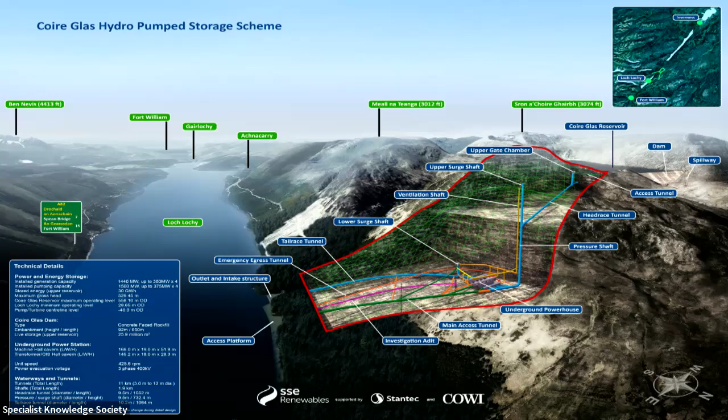The tunnels then connect to the existing body of water at Loch Lochy in the lower works. This diagram shows the complexity of what we're trying to build.

To the south of the fault, shown in light green, we have the Great Glen Fault Zone rocks, typically characterised by weaker, brecciated, heavily sheared fault rocks. To the north, we have the Tarvie Psammite Formation, which is more competent metasedimentary units, such as psammite and semi-pelite.

There's been a lot of work, and the Great Glen Fault has been studied extensively across Scotland. But prior to the GI works, there was quite limited information on the site, which resulted in a lot of uncertainty over the nature of the fault zone rocks in particular, and the position of the Great Glen boundary.

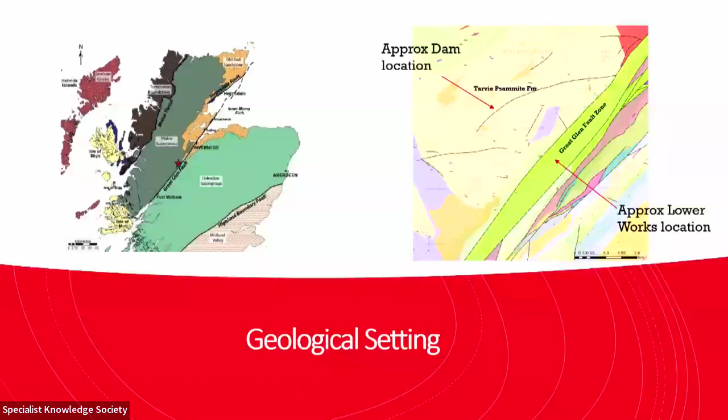This was one of the key project risks identified early on, and one of the key drivers for carrying out such thorough ground investigation.

In terms of ground investigation, we've carried out two main packages of work to date: the exploratory works, which we'll talk about today, and also the wider site ground investigation.

The exploratory works generally comprise a drill and blast tunnel excavated from the lower works towards the proposed location of the powerhouse cavern. It also includes an underground drilling, monitoring and testing phase to acquire ground investigation data for the scheme.

The key aim of this exploratory tunnel was to investigate the ground conditions and obtain detailed geotechnical information. It's worth noting it's quite a unique form of ground investigation, but it's allowed us to get a continuous log of data right the way through the fault zone and into the more competent units.

Just to touch on the wider site ground investigation as well - we won't cover this today - but this was carried out using more conventional methods: boreholes, trial pits, geophysics, and it's focused on the surface infrastructure, including the dam and reservoir footprint.

I'm going to give you a very quick overview of the design of the adit. You could probably do a whole hour's presentation on the actual design, so it's going to be very brief. The design was undertaken using finite element analysis together with the Q system for a range of in situ stresses using Rocscience RS2 and Plaxis 2D.

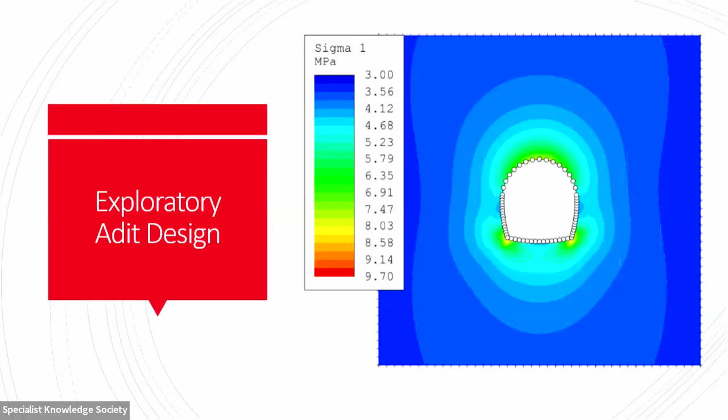I'm not going to go into the finite element analysis for this. I'm just going to touch on the Q system as it's relevant for the data collection. So we used the Q system methodology for this. It's a rock mass assessment developed in 1974.

It's widely used in tunneling and underground excavations to assess rock quality and support requirements. It's based off 6 parameters, which can be split into 3 parts. You've got your degree of rock jointing, which is your RQD, rock quality designation, and your joint set numbers.

And then you've got your joint friction, which is your interblock shear strength. This is determined by your roughness and your joint alteration. And then you've got your active stresses, determined by your water ingress, and your SRF, which is your stress reduction factor, determined by any weak zones or overburden pressures.

Our adit support system was based off these Q values determined using geological surface mapping. However, there was a healthy amount of engineering judgment involved, because the Great Glen fault zone lacks a lot of rock outcrops or good quality rock outcrops. It was mainly done through streams.

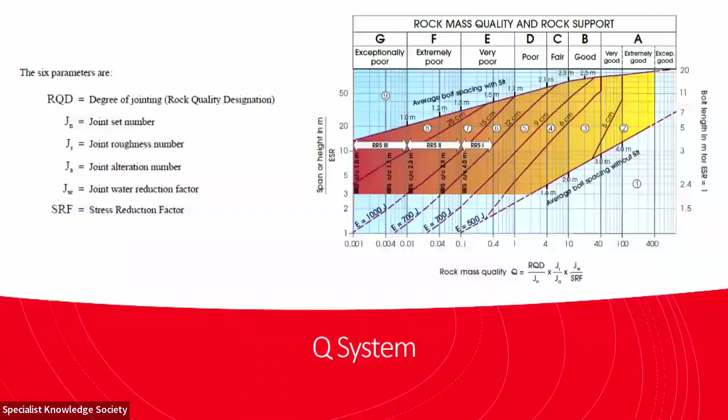This range of Q values for anticipated geology was used with the tunnel proposed spans and the structure type to determine the required rock bolt lengths, spacings and shotcrete thickness, thus providing us a full suite of support classes for varying Q values.

This is one of the standard adit profiles we had. It's a 5x5 meter horseshoe shaped profile with a 4 meter adit. This particular one was 80 mil of sprayed shotcrete lining, and the dowels are centered at 1.5 meters, and they were 2.8 meters in length, drilled in an array of 4 and 5.

Profiles did vary with passing bays and drilling niches, so shotcrete thicknesses and dowel spacings did change. Also, the first 10 meters was a set design, more robust with lattice girders used, and then the first 100 meters also has slightly thicker shotcrete. The range of support was from steel ribs to spot bolts, really.

I'm now going to pass over to Joe, who's going to talk about mobilisation.

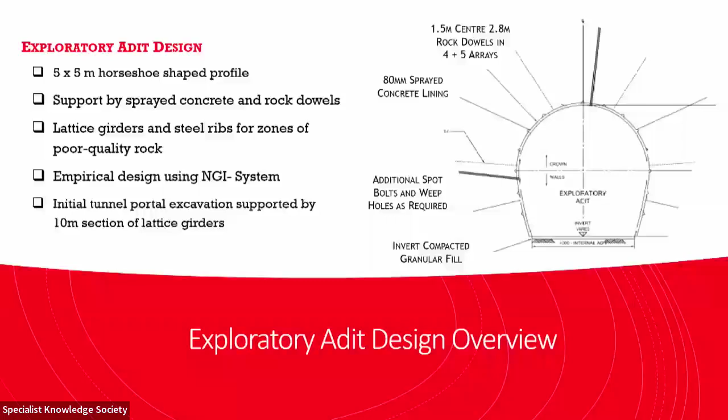To give a roundup of how the tunnel project was delivered, we started with mobilisation. We got access to site in the Highlands of Scotland in December, not the best time to be starting major earthworks, but that was preceded by a few months of a small ECI, and there was real keenness from SSE for us to get on site and working as soon as possible. So again, we're in the Great Glen of Scotland.

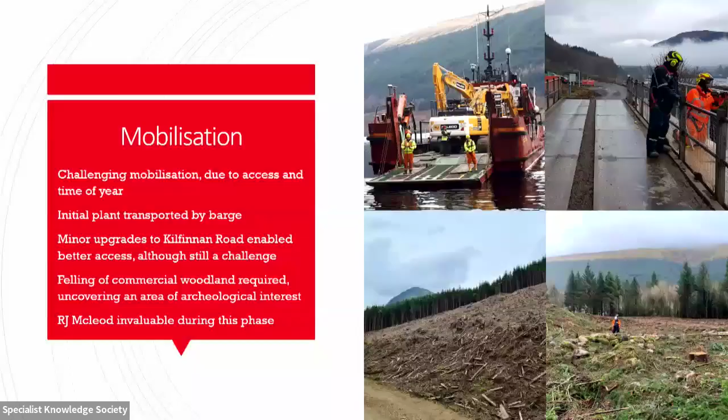This is the sort of thing we could be dealing with on any given day, or even sometimes in the same day. Whether you could see the other side of the loch was dependent on whether it was a good day or not. Mobilisation itself - due to the access available and the time of year, we had to be very careful with what we did.

First, a barge was used for the initial site plant deliveries, just to get us on there. The Kilfinnan Road, which comes to site, is a single track road with passing places through some tight bends and farmland. So a limited amount of work was done to strengthen some bridges and improve that as best as could be done, but that was always a pinch point for the project.

But realistically, we did manage to get pretty much everything in through that road and out again. The first works on site was felling of the commercial woodland around the area, giving us access to our compounds and the portal area, as well as some archaeological interest, an old sheepfold.

It should be noted, RJ McLeod were absolutely vital at this point. They're the local contractor, and they really allowed us to hit the ground running.

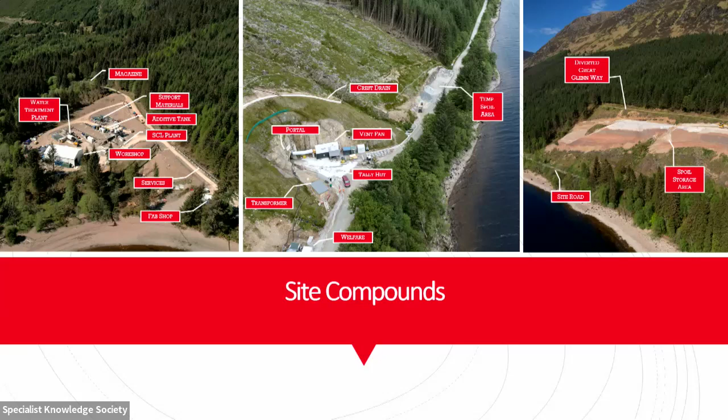So the 3 main site compounds I'll talk about here. The first one is Area 7, on the left. That was our main store workshops, where our SCL plant, provided by Cemex and supported by Normet, was located. We had the water treatment plant there from Zublin.

Say workshops, fabrication shops, materials storage. We had generators set up on site to provide 3.3 kV power, supplied to Area 7 and to the tunnel, so we were completely off-grid in the forest. We also had a magazine situated conveniently in the trees, out of harm's way, with good distances for any separation or for the capacity that we had.

Coming to the portal, you'll see we were right on the loch shore there, with a small line of trees in between us.

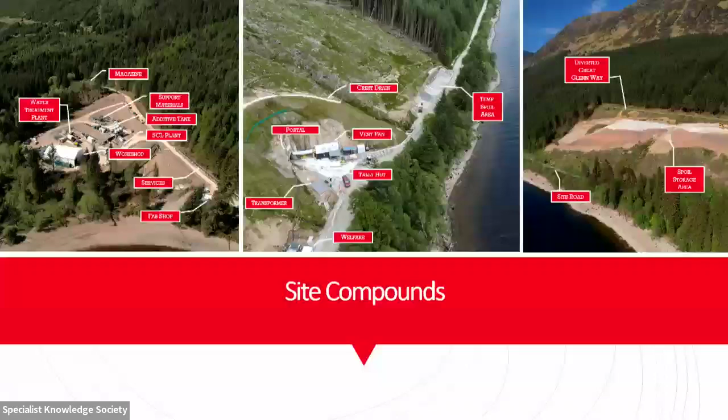That was the access to underground, right perpendicular straight into the mountain. We had a temporary spoil storage area there where we could work 24/7, whereas other areas we had restrictions - tally huts, transformer, welfare, ventilation, everything you'd expect to find at the portal.

To give a better idea of how the constraints of the site really were, on the right you can see the spoil storage area. You can see how close we are to the loch. Then we've got our main site access road.

The spoil storage area is on quite a steep hill. We've then got the diverted Great Glen Way footpath, which is a major tourist route and not always followed - it would not be irregular to find someone lost wandering through site, hopefully not when anything too much was happening, into commercial woodland and then straight up to the Munro above.

So we really were quite constrained in what area we had access to. I'll pass over to Tom now just to talk a bit more about the design of that spoil storage area, because that's interesting in itself.

Yeah, okay. Thank you, Joe. And yeah, thank you, audience. So Joe's mentioned already that one of the constraints on the Coire Glas works was access.

Initially they brought in material by barge, and then later brought in material by road. But it was never viable, via a single track road and a long unpaved section of road, to actually remove spoil from site - nor would that ever be an idea we'd really contemplate on this job.

So what we had to do was build up a major earthwork scheme, and we divided this into two halves. You can see the constraint we had from forest to lochside, and all the material from the tunnel drive went here. This was classified by grades, primarily fines content, and then was distributed into two large bays or cells within the spoil storage area.

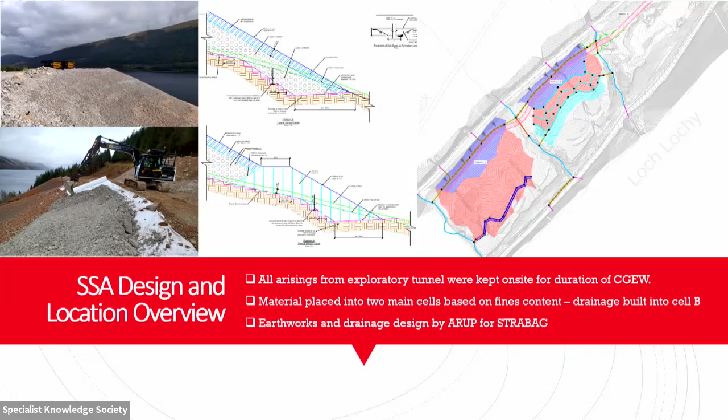Okay, so just carrying on - project team. With our location and the scale of the job, we had a small team, and self-sufficiency really was the most important part of working as remotely as we were.

In terms of permanent staff, we had about 20 to 25 site-based personnel who were predominantly on the technical side - engineers, geologists, health and safety, environmental. We were also well supported from North Yorkshire, from the other STRABAG office, about maybe 15 to 20, not necessarily permanently devoted to us, but from the support functions.

In terms of labour, we had 3 shift teams working on a 12-hour back-to-back rotation. We did a 10-5 rotation with them, owing to the site location and commuting distances - about one long stretch and then 5 days off in a row, just so people aren't spending their own time travelling.

On each shift team, 8 tunnel ops, mostly made up of your pit boss, drillers, shot firers, sprayers, and then 4 fitters and 2 electricians per shift.

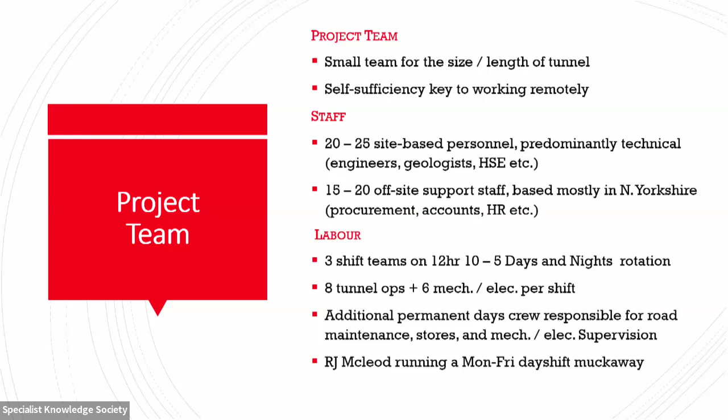Additional permanent day crew were responsible for road maintenance, running the stores, and overall supervision. And again, RJ McLeod basically ran the muck shift - we transported all spoil from the tunnel to the temporary spoil storage area, and they were responsible for taking it up to the main spoil storage area and the construction of the spoil storage area itself.

Okay, on to the good stuff. The first blast was done in March 2023. This was for the portal, so this was a surface blast. The results speak for themselves.

I was expecting a little bit more of a reaction, but anyway.

Those will have noticed the first part of that was a pre-split. That was really effective at giving us a really clean joint to break back to. You can actually see from the bottom image there, the half barrels are still showing.

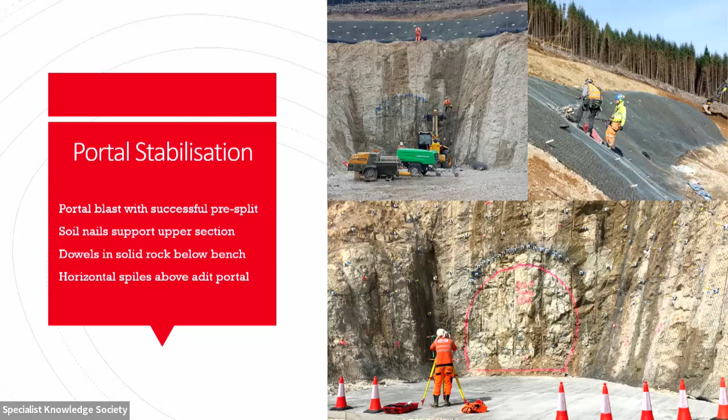That was really effective, with Tom Woods in the audience doing a bit of surveying for us. Above the portal, we had soil nails in some of the weaker ground, and below a bench, we were into rock dowels. Then there was a set of horizontal spiles built in above the portal for protecting those first two advances.

We then added to that a false portal. As already mentioned, the first 10 meters was done with lattice girder support. So we built effectively ring zero inside of the portal, giving us the ability to connect onto that lattice. So we're already working off something that was set out into the correct position.

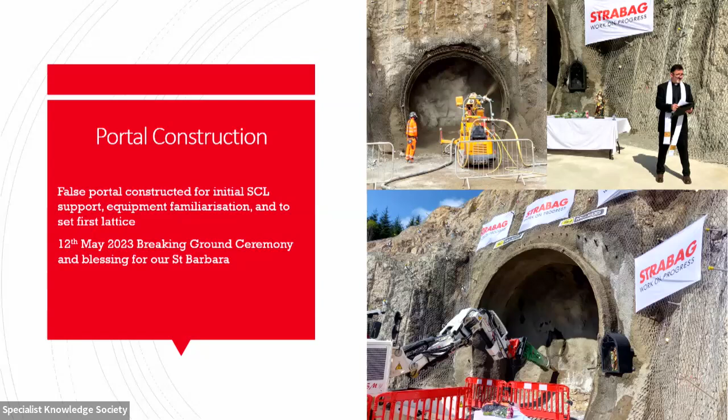That was then sprayed in, and we had the inaugural breaking ground ceremony with Father Danny from the local church, who was very keen to get the local community involved with what we're up to. So that's breaking ground with the excavator, which basically took us into the tunnel construction period of the project.

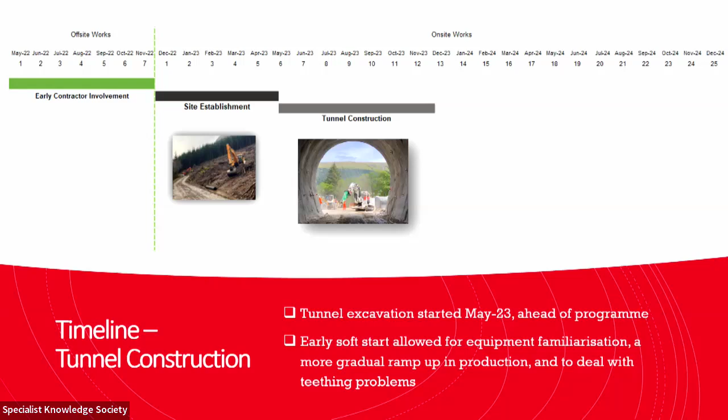We started just ahead of program in May 2023, and we had a bit of a soft start, which was really useful to make sure all the equipment was working. We had a gradual ramp up in production, so it wasn't a mad dash to start, and any teething problems came out through that.

We've seen the cross section, but this is the long section that we were dealing with. It was 900 meters long. We had passing bays roughly every 250 meters. Generally it was quite straight, then we went onto a slight long radius right-hand bend. Those passing bays give us logistics of the turning circles, and we had the drilling gallery at the far end.

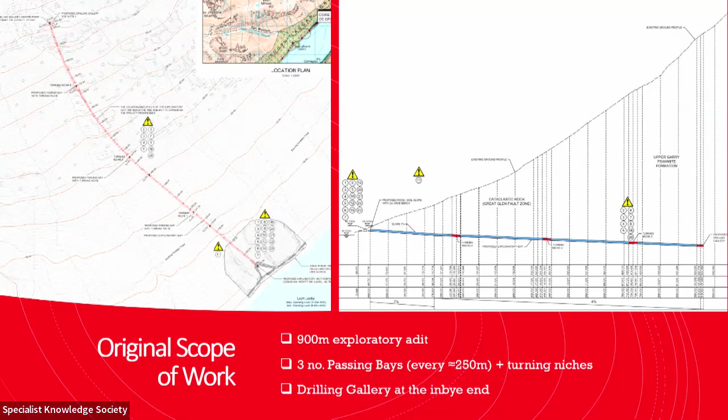Vertical alignment: the first 100 or so meters was done quite steeply at 7% grade, and then after that it was a 4% grade right down to the drilling gallery.

So for those not familiar with drill and blast, we'll do a very quick run through. Basically each advance cycle, and we'd normally do two of these per day in a standard section of Class B tunnel, starts off with drilling. We'd then charge that, using cartridge emulsion, which is the easiest thing in terms of procurement and use given the length of the drive. We'd then blast.

We needed between half an hour and an hour to allow the fumes to clear, depending on the length, and we'd go in and muck out that drive and that advance. Scaling in this ground and hard rock was some of the most important part of the process, and that was especially important with the blocky ground that we were in.

We then had an hour dedicated to the mapping. Tom will mention more of this later, but this was one of the key parts of the project. That would probably make most pit bosses livid, the fact they know they've got a geologist unmovable for an hour to look at the face. But on this project, it was a very specific thing.

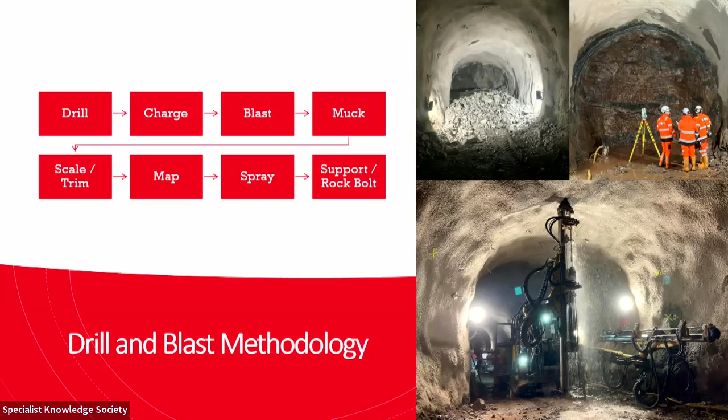Spray was then completed, so sprayed concrete to the desired thickness, and then we'd install supports depending on what that mapping had told us, and we'd repeat the cycle again. A bit more about that support class system as well.

So we've seen the design, now how that would actually work on site. We'd have the daily review meeting, we would get the design for the upcoming section of tunnel, and we'd sign off as required on a required excavation support sheet. That is something that everybody who needs it—engineers, geologists, pit boss—can have in their pockets, telling them, based on the information the geologists provide, what support they need to install.

The mapping's then completed, that comes out with that Q value, and the support can be decided. But there's also elements of flexibility built into this system. There are toolbox measures put into that if we encounter water, if we encounter blocks that look like a wedge feature that can't be scaled, all sorts of things.

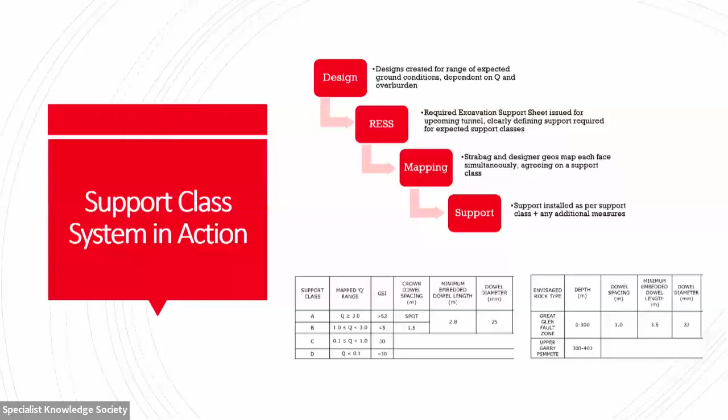And this is an iterative process as well, which is good. So features we encountered throughout the tunneling, as we went on, if we found solutions that were better at dealing with them, we could put an RFI in, build that into the system, and then we've got the best toolbox to deal with the issues or just the ground itself.

Very quickly, equipment.

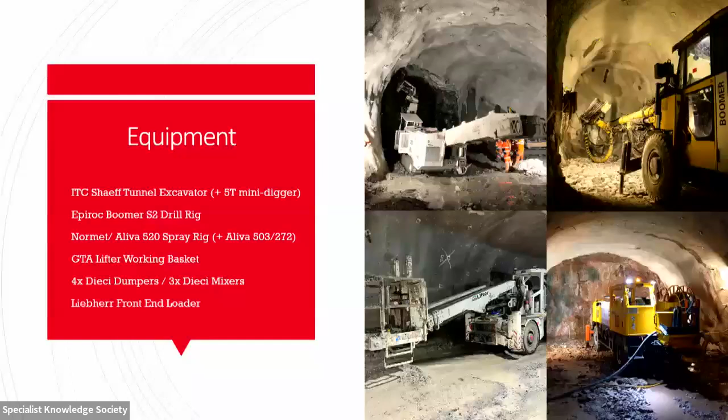So we're using an ITC Shaeff with a 5-ton mini digger as a backup, Epiroc Boomer S2 drill rig. We had a Normet Aliva fully electric, I believe the first fully electric 520 in the UK, plus a backup 503 and pump. GTA was a heavy-duty lifting basket. Dieci dumpers will be familiar to most, and then a front-end loader for the surface and for cleaning up the muck pile after the blast.

Some of the good software I had available - the Epiroc Underground Manager software was really useful. Rather than setting out a profile on the face from a total station, what we were able to do is set up a laser line to the side with the total station. The arm on the boomer could then be sighted on 2 targets onto that laser line, and the rig would know its position in the tunnel in space. You tell it which drill plan you want for that section of tunnel, and it'll know where the hole positions are.

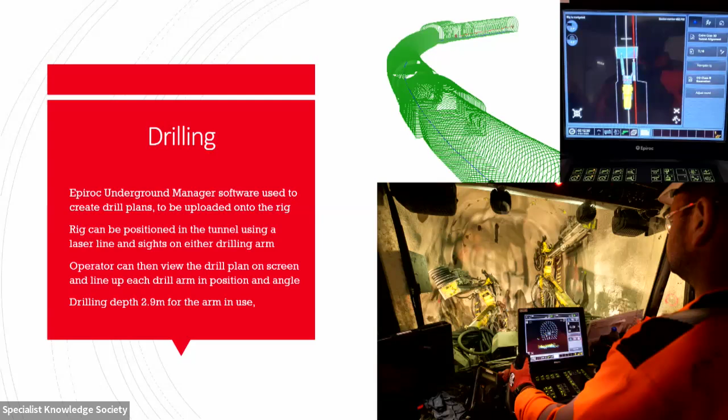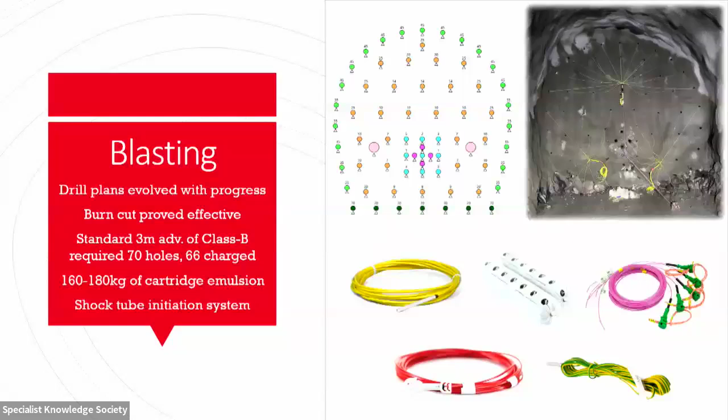Really useful. Blasting, we were using conventional emulsion explosives, cartridge emulsion. We were generally drilling a 3-meter advance, which requires about 70 holes, 66 charged, 4 void. We were using about 160 to 180 kg of cartridge per blast, and then it was a shock tube initiation system, so 6-meter lengths to most of that in the hole, followed by bunch connector, surface connector, and electric det to set that off. And if it all went well, it would look like this.

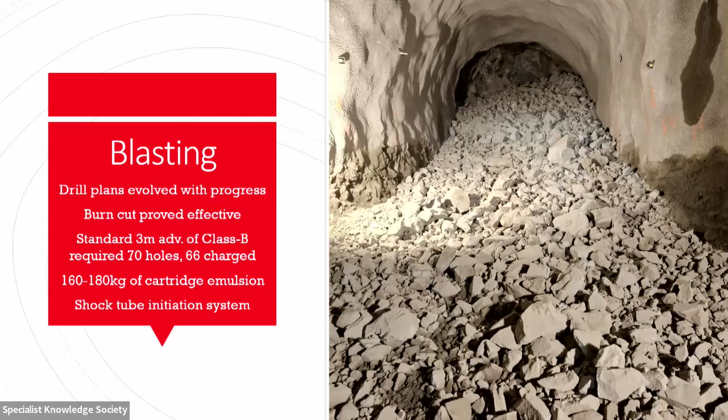Fragmentation was one of the most important things for us. Timing was everything. We didn't want to spend time breaking apart loose blocks and large blocks. Everything had to get the apron of the Shaeff. So those that know their powder factors might have thought we were probably overblasting a little bit, but time was important to us, and getting it up that Shaeff as fast as possible was quite important.

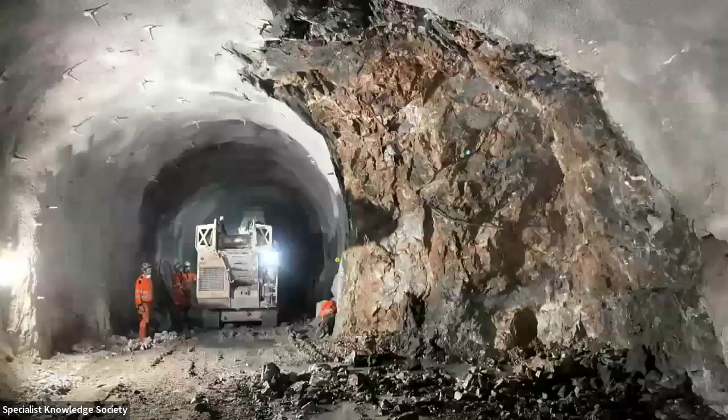Towards the end in the drilling gallery, the blast got a lot bigger. By the end, we were sort of setting off about 360 kg of cartridge per blast. By the time we got to the real drilling gallery sections, 5 bunch connectors - you know, some good blasting.

Profile control - again, we had some good software available. Amberg was really useful to us. We could basically build the tunnel in the software. Engineers for the chainage of the tunnel knew what the profile was. We could do as-built down there at the face to make sure that everything was in tolerance in terms of profile, check it again after the spray, and make sure we've applied the correct thickness. And then all of those records form basically our quality records for the job.

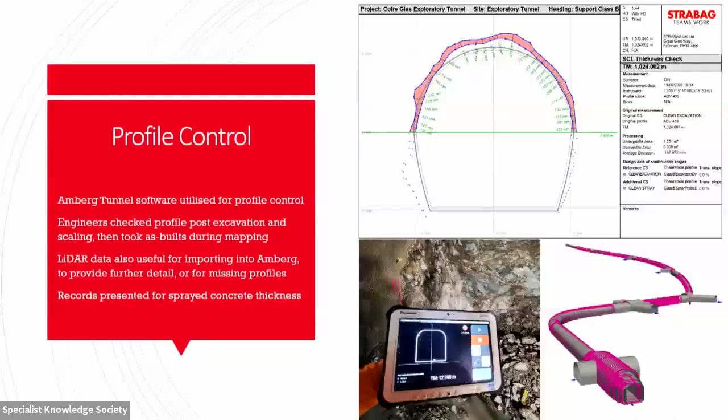That's all very well. That was basically building the tunnel, but actually, as Tom will say, that wasn't the most important part of the process.

Yeah, so for the most important part and the real reason for the adit, the geological deliverables and processes - mapping was undertaken at each advance, and it was a process between both the contractor and the design engineers.

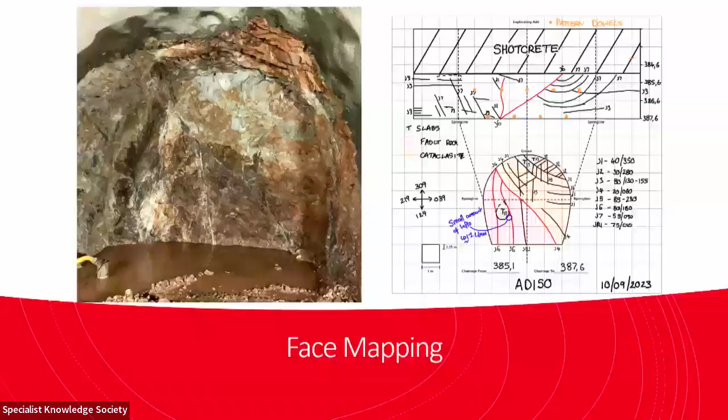If any further spot bolting or anything like that was needed, then it would also be signed off in the DRM. And that's just another example of one of our mapping sheets - that's for a drilling gallery. You can see you've got a nice felsic intrusion cut across with a discrete fault there.

This section was fairly early on in the tunnel, in the cataclasite, which was fairly difficult to map, hence why you've got heavily jointed and varying jointed sets.

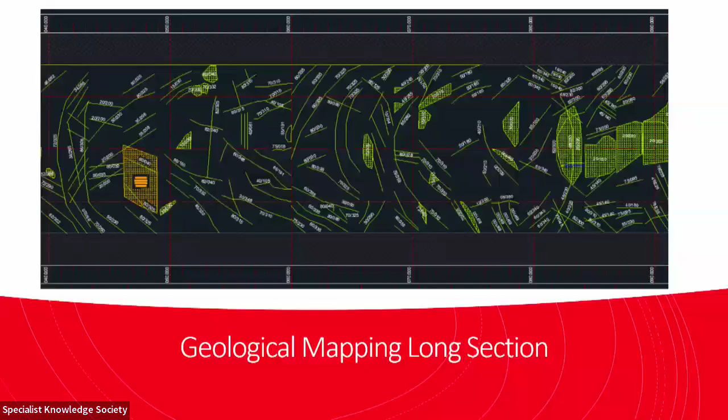Then we had the advanced probing. Probing was undertaken approximately 20 to 25 meters in advance of the tunnel. Two probe holes were undertaken to provide an idea of what we were to expect when it comes to blasting.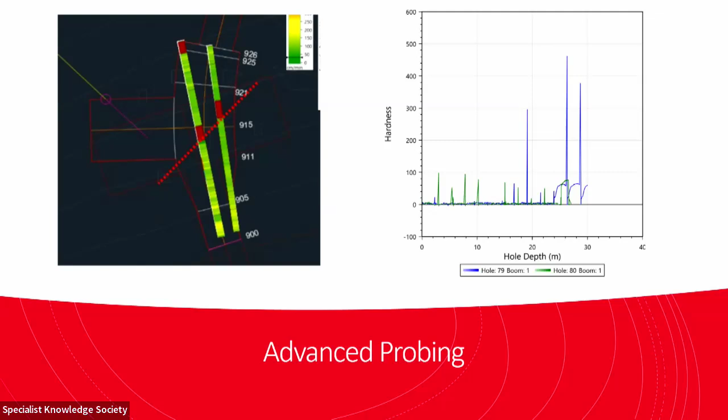Green is good ground, where drilling was slow, and red is poor ground where drilling was slightly faster. Data was collected from the boomer on 20mm increments, measuring the drill length and time to provide us with a penetration rate. The graph on the right shows the difference between the two arms on the boomer. The peaks are actually where they've changed the rods, so it's a fairly consistent drilling penetration.

Similar to the probing, we also used measure whilst drilling data to give us an idea of where we encountered some soft material. You can see on the right hand side where we hit the fault, which will be spoken about a bit later.

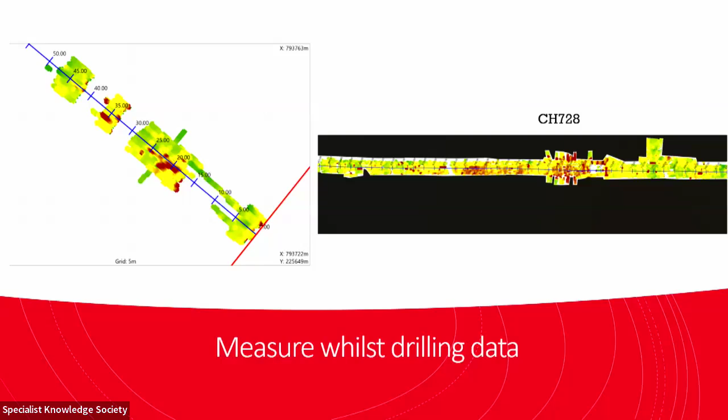And then while we were mapping, we were doing the LiDAR and the photogrammetry. We used this data to correlate with our mapped joint sets that we picked in person.

We used the LiDAR data in a piece of software called Maptek. That allowed us to both manually and automatically pick the joint sets. This allowed us to collect much more data, more measurements of dip and dip directions of the discontinuities, also more accurate measurements.

However, the only downside to this was that it was heavily dependent on the quality of the scan. If the scan wasn't particularly good, then you couldn't pick anything out.

Then the uses of this LiDAR data - we used the Rocscience suite. We took this data and input it into Rocscience Dips, and we pulled out our dominant joint sets.

Following that, we would use Rocscience Unwedge to determine if there were any wedges in our advances, and if our prescribed support was suitable. If not, then we had to install further rock bolts.

In the section on the right hand side, we found a wedge that wasn't quite meeting the right factor of safety for us, so we had to install an additional three 7-meter rock bolts into the crown due to the persistence of that single discontinuity. Now I'm going to pass over to Joe to talk about the SQ and the fault zone.

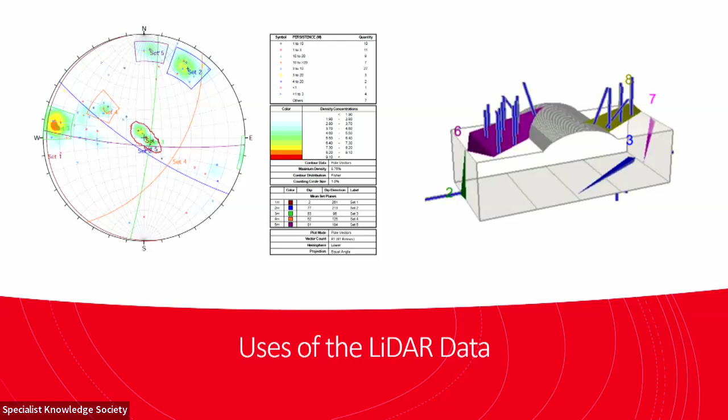Advance 282, you can see here the start of a feature in the crown, competent rock underneath, and then this is fault gouge. My geology knowledge is not as good as the others, but on the next blast we could see very clearly that what we were into was very poor quality rock.

We had about 1.5 meters of overbreak above this.

When the face mapping was done for this advance, we'd already decided to get in and spray it, or at least the poor material, just to get it closed as soon as possible. But we were no longer in good, competent hard rock. We were at an overburden of about 420 meters at this point, and we'd also started widening into the next passing bay. The Q was right down low, much lower than some of the other advances.

We'd hit discrete faults before, and there was a hope this would be the same. So there was agreement to do a short advance, a little more than a meter, and hopefully see some improvement in the crown. But after that blast, we could see this material went straight up to the top, leaving us with poor ground and out with the design parameters.

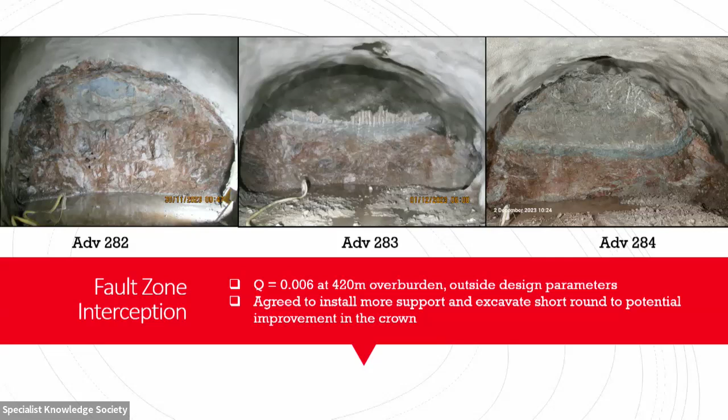The face mapping shows it just as clearly. I like the note here that says fault material not affecting stability in this advance, but we can see it only got worse. Credit to Antonio for these ones.

We managed to do some investigations on the ground. We had probing basically of access to us, and we probed behind us and in front of us. We were able to sort of map out the location of the fault. This sketch is lovely - I think this is one of Rob's. Forward of us, whenever we hit the change in color, we were aware we'd hit this faulted material.

We went ahead of us, perpendicular to the inclination of the fault we'd worked out, and we were still not seeing any improvement. So that left us out with the design parameters. The Class D design only worked for an overburden up to say 400 meters, and the decision was taken to abandon the passing bay and relocate it. I'll let Sean run through what we then did as a project to get past it.

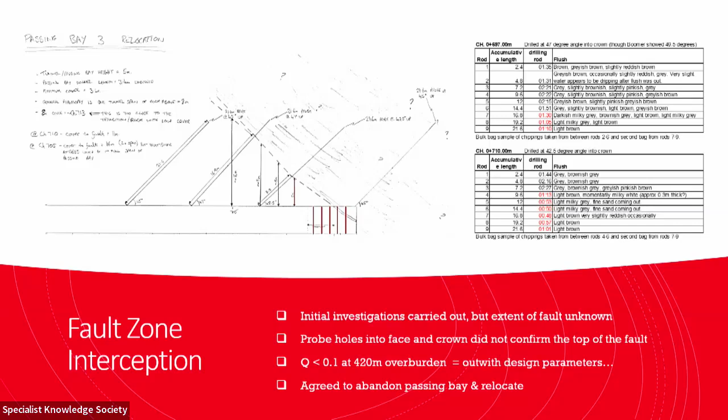As Joe says, the ground conditions encountered here were out with the design parameters for the original design. So we instructed a halt to tunneling at this point, and instructed Stantec-COWI to develop a bespoke design to allow us to continue the tunnel safely. It's worth noting that Stantec-COWI carried out this design with very little information, mainly based on the face mapping records encountered in the main part of the fault zone, as well as the additional probing that Joe's just shown.

In terms of the design as a whole, it was more based on numerical modelling, as well as the application of the geological strength index as opposed to the Q system, which had been used for most of the other tunnel. This was a really good period of collaborative working between SSE, Stantec-COWI, and STRABAG to optimize and refine this design through several technical workshops.

You see in the middle of the screen here, this is a cross-sectional profile of the new support that was installed. The key features are this circular profile changing from the original horseshoe shape. This is formed from a steel ring, as well as 300 mils of shotcrete sprayed around that. We have a series of radial dowels surrounding the circumference of the tunnel, as well as spiles in the crown and face support in terms of face dowels to give extra support during excavation.

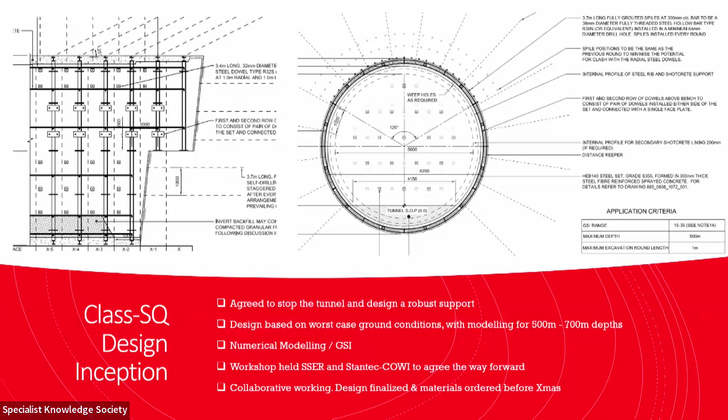In addition to this, the support leading up to that fault zone had already been installed through shotcrete and dowels. Stantec-COWI also demonstrated that the fault plane was likely to dip just above the crown in this area. So the face mapping was showing generally okay rock, but there was also a risk of poor ground just above the crown and insufficient good quality rock cover.

So with this part of the tunnel over a length of maybe 7 meters, we asked Stantec-COWI again to produce a bespoke design in this area in the form of reinforced steel ribs and added shotcrete. It's got a funny profile here on the image on the right, and that's where we've expanded out and widened for the passing bay that was originally proposed at that location.

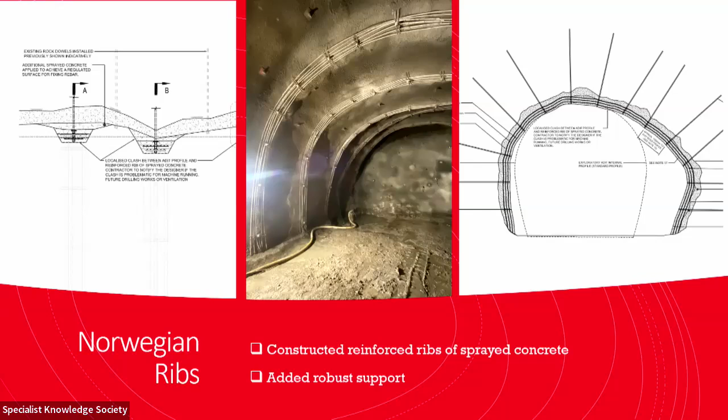So from our point of view at SSE, encountering the fault zone did result in a delay to the works, but it's something we're really happy we identified during this exploratory tunnel. We've pinpointed the location of it and characterized the nature of it as well, so we see it as a positive, taking that into the main works.

One of the things we were able to do during this stoppage, while we were redesigning the tunnel to advance through, is some quite good ground investigation. The purpose behind this was to understand the fault zone and verify the design assumptions, which at this point were actually progressing at some pace.

We did this in two main ways. The first thing we did almost immediately after stopping and forming those Norwegian rib advances was to carry out a tunnel seismic survey. We brought in a company called Amberg to do that, and that survey estimated the extent of the fractured ground by a non-intrusive method, so we could determine what additional ground investigation works we could sensibly do within this stoppage.

The other main thing we did during the stoppage was drill a horizontal borehole, in the direction of the tunnel drive. The idea behind that was to estimate the thickness of poor ground. You wouldn't necessarily be able to estimate the true thickness of a fault, but that's more of an academic exercise compared to the zone of poor ground, which you'd see very clearly through the geotechnical log.

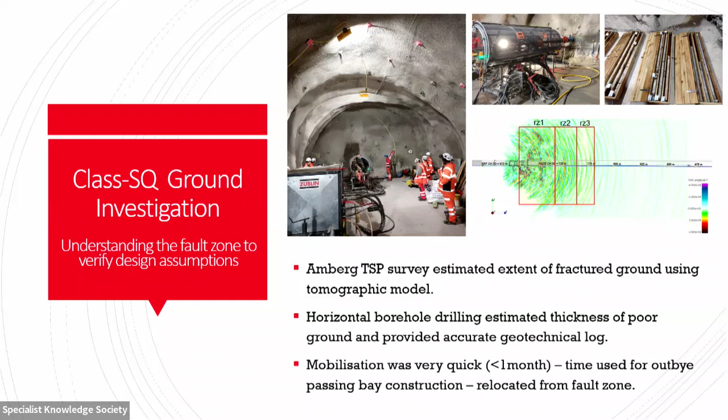I'll let talk more about the design of the SQ. So when it actually came to getting through SQ, we've seen the cross section in 3D - that's the sort of level of support we were dealing with for installation.

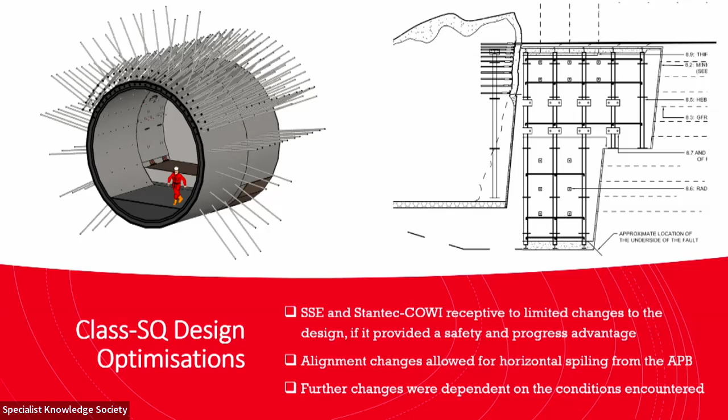As Sean's already mentioned, thankfully at this time we also had the ability to make some optimizations that weren't going to impact the safety, or in fact improve it. Because we had the abandoned passing bay in that zone, we actually had quite a large space to deal with, and that allowed us to do horizontal spiling rather than the overhead spiling per advance. We were able to couple the drill rigs, so we ended up doing about 12 meters of horizontal spiling ahead. That meant we generally stayed outside of the profile with overhead protection that was much easier and much faster - getting through the fault zone quickly was in everybody's best interest, as limiting the time for open ground was really important.

What that actually looked like in the end, you can see on the left the number of profiles we had. The first was the normal tunnel alignment, we then brought it to the side 1 meter, and eventually down. You can see the blue and white markings for the spiling positions.

To restart tunneling after a few months of no activity over winter on site without tunneling happening, we wanted to make sure we were fully ready to restart. We did two pocket excavations either side of the face, which allowed us to site the first leg of an H-beam, giving us something to work on to connect that first advance.

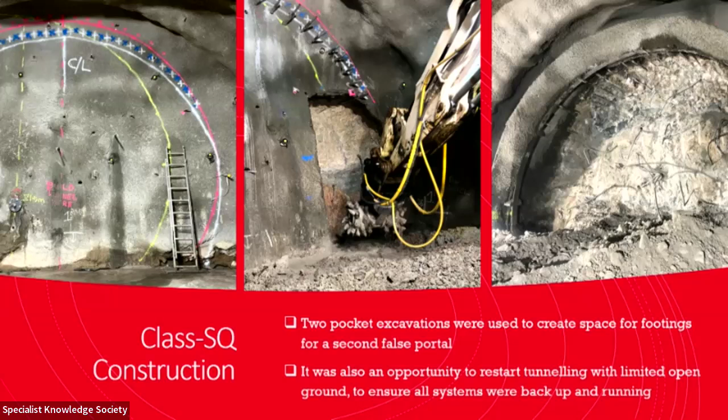You can see the overhead spiling was quite effective. It limited overbreak - it couldn't get much higher than the spiling - and gave overhead protection for the guys working in that area positioning the ribs, with realistically a small amount of shotcrete. The overhead spiling made it a lot safer.

Other things quickly to run through: the shape we were using at that point, given it had the apron on the front and we were now going to top heading and bench excavations, we ended up bringing in the Terex 210 for this area. You can see from the space proofing that it was really well suited for the sizes and the area we were working in.

You get an idea of the amount of support in each area from that central photo - you've got the H-beam ring going full circle, dowels in between, and the overhead spiling. This was really heavy, soft ground tunneling works basically in hard rock.

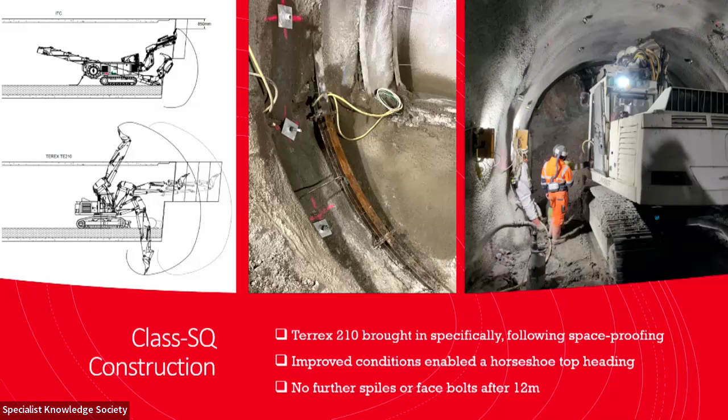As we went along, the ground improved. We were able to drop the bench level quite quickly from a half-height bench to a horseshoe, which eased the access and the space we had available, as well as the working at height from a high bench versus a lower one.

As things improved further, we actually resumed blasting, not with any great amount of powder, but with spacings quite wide, about 1 meter. We were able to fracture the face quickly and then just finish it off with a road header.

So in the end, we installed 28 meters of Class SQ, completed in 1 month. We averaged just over 1 meter a day through that zone, which I think was very impressive given some of the initial advance rates we thought we'd be dealing with. That took us through the fault zone to the end of March 24.

At that point, we basically had what we thought was the home straight to the drilling gallery. I'll let Sean take it from there.

Spring 2024, tunneling was going pretty well. To provide more context to the overall project, data was being reviewed and assessed from the exploratory works in real time and used to verify assumptions for the main works reference design. We were really happy with the quality of the data we were getting from the tunneling, and instructed an extension to the tunnel.

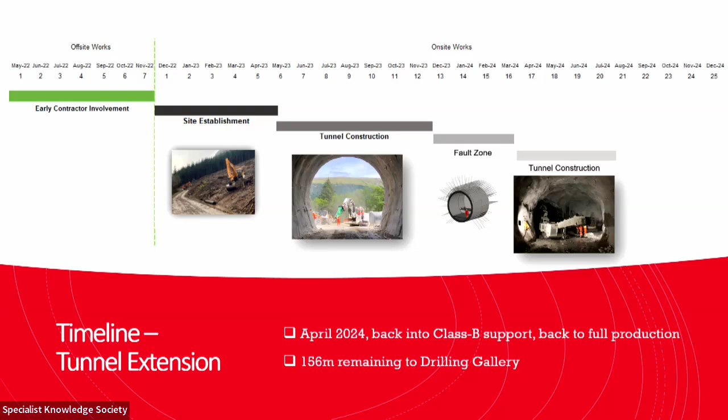This resulted in an extension to the tunnel of 300 meters, and also the construction of 2 additional drilling galleries. You'll see from this diagram we're tunneling at greater depths than originally planned, and there's also a slight change in alignment. The tunnel kinks round to the right in the northern part, curving around the side of where the proposed locations of the caverns were to be sited.

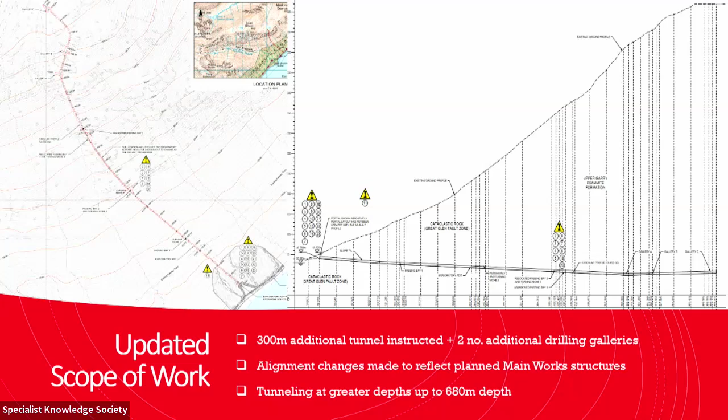In addition, there was a change to the underground ground investigation works. The original scope had 1 drilling gallery and a series of boreholes drilled from that single point. With the new alignment, we had 3 drilling galleries, drilling from multiple points along the extension. This increased spatial coverage of the data, as well as enabling in situ testing in closer proximity to where the caverns are, and at more representative depths. While these 2 changes were quite significant, we're happy that we maximized the data quality, particularly from the tunneling here.

Just to talk about the delivery of that - although it came as a bit of a surprise, we got a very clear instruction from SSE that they wanted this extension. We didn't know exactly what it looked like at that point, but they gave us a clear instruction: keep the people on site, get the materials and equipment you need, and get it done. We were aware a lot of it was going to have to get worked out along the way.

For a long time, the whiteboard on site was the most up-to-date design information we probably had. We were literally sometimes getting the information on a Friday afternoon for what we'd be building next week. It didn't help that April was our biggest month of production just before the extension. So we got to it very quickly.

You can see from the center here, these are the three galleries, gallery A, B, and C. Every different color is a different profile. These sections were complicated in the profiles - we needed higher profiles in some places to enable construction off to the side, and we had the testing niches to think about, which were a different profile again.

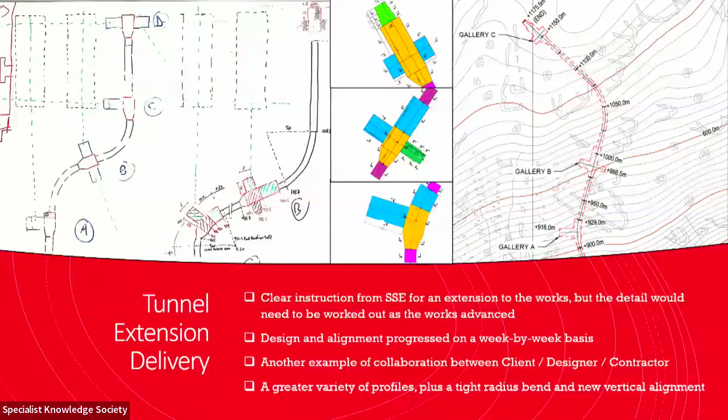We also had changes in a tight radius bend, which became basically the limit of what we could build and how tightly we could go, and changes in vertical alignment. You can see from some of the photos, we were really into some of the largest spans of the time - 8 meters wide by 6 meters high.

The biggest hurdles for us with a tight time frame was the procurement of the explosives. They're not an off-the-shelf product. Our suppliers, Brexco with Austin Powder and Orica, did fantastic work for us to get some of these detonators at the front of the queue and into the country from Europe.

Otherwise, we never would have been able to proceed. Other things like the refuge chamber, we'd never needed for the works before, but because we were now going to be doing the GI works with 2 open faces, or 2 drilling faces, we needed a refuge chamber.

So people could work in proximity of each other, and that had never been envisaged. Things had to be bought quickly and get to site as soon as possible. Labour was all signed, sealed to go off to HS2, and we needed to pull them back and say we need you for an extra 2 or 3 months. But anyway, the last blast, 502, was done on the 1st of August '24, only 3 months after the extension had been instructed. We built 3 galleries, 200 meters of tunnel, in that short period. By that point things were really up and running.

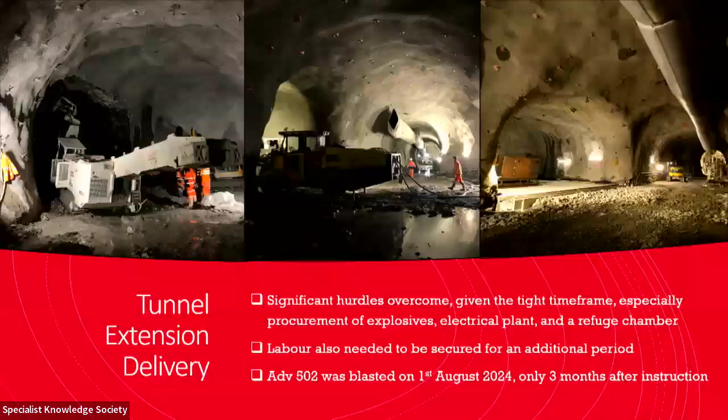As Joe said earlier, there's a total of 502 advances mapped for the tunnel construction, about 5,000 rock dowels installed, and 4,500 meters cubed of shotcrete was installed over the whole thing.

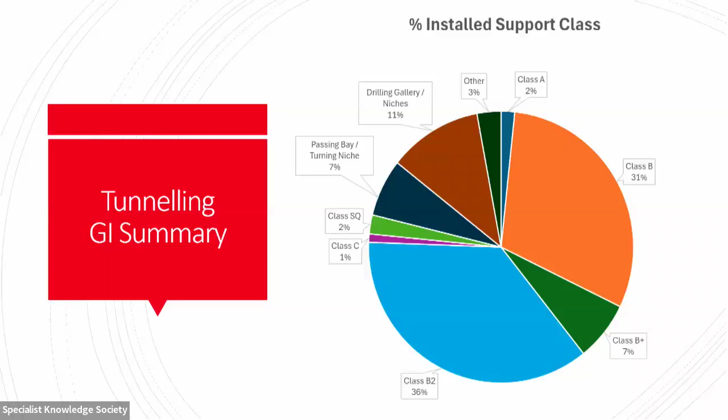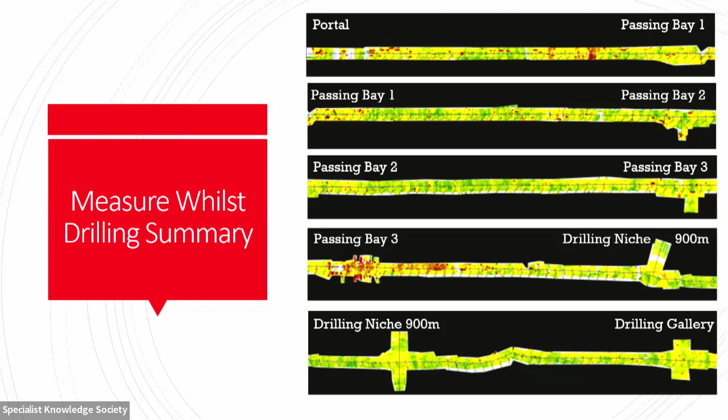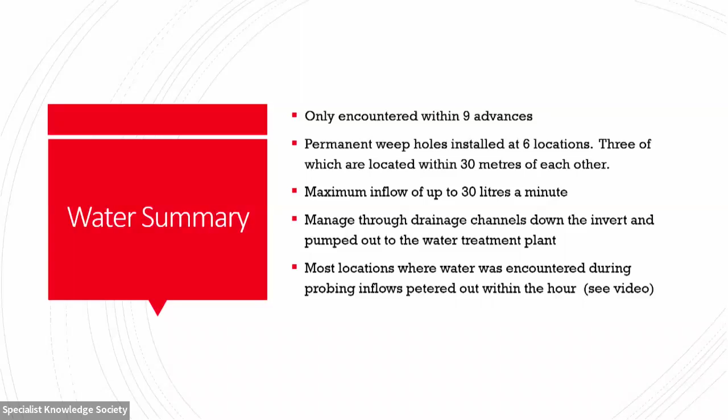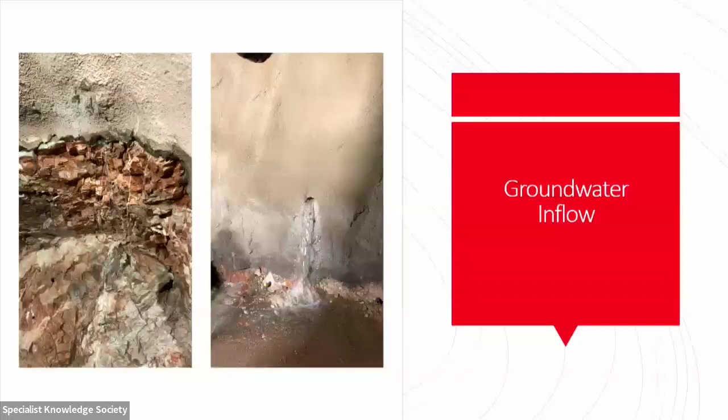But yeah, it's all good. Most of the probe holes were dry. There were a couple of probe holes where water was encountered, but it always petered out within the hour, so it didn't really stop progress. Just a couple of videos of water. You can see on the right hand side, that's the probe hole - that didn't last very long, about an hour. You can see shower-like from the joint set on the left-hand side.

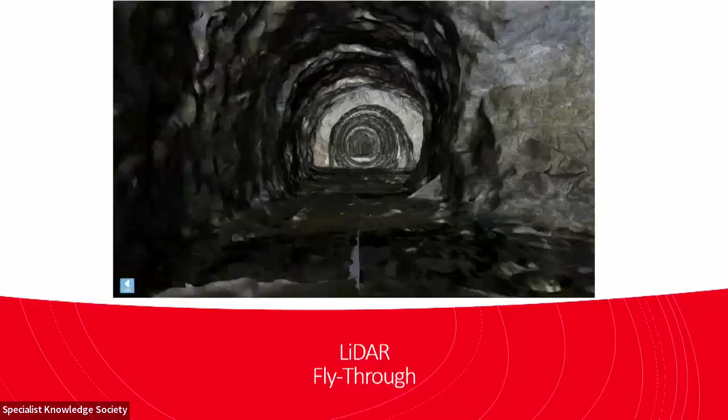And then we've got the LiDAR fly-through. Each mapped advance had a LiDAR scan, all measured at 1 millimeter scale, and you can see the excavation profiles. You just pass through the first passing bay, and then as we get past the SQ system, there's a notable difference in the quality of rock - you can see it's slightly more blocky. I'll let that run out as we come into passing bay 3, then quickly into the SQ section, and it starts to get much more blocky as you pass into the first drilling bay or gallery, and then into the second before you get to the end of the tunnel.

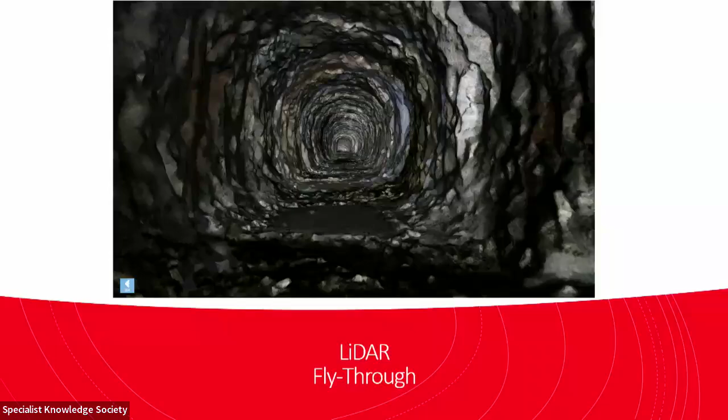Pass over to Tom for the underground GI. Yeah, okay, so one of the things which that LiDAR survey really shows is it gives a very, very good meter by meter record, an incredible density of data. Tom certainly stole my thunder earlier on when he said that the tunnel itself is an incredible form of GI.

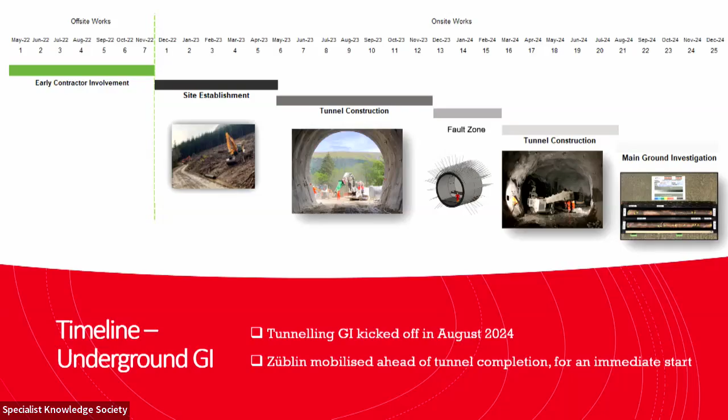While that may be true, what it doesn't do is give us the same predictive power as a series of boreholes do. So, as Sean said, this design was quite dynamic as we were progressing to each of these drilling galleries. But it allowed us to consider the construction and operational requirements for that underground ground investigation work - the logistics of bringing in drilling equipment, and it opened up the opportunity for simultaneous drilling operations in different galleries, and simultaneous in situ testing and drilling operations as well.

Overall, we were able to carry out an underground ground investigation campaign which has been one of the largest and most complex in the UK in recent years. This was completed between August and December 2024. A total of just over 1,300 meters of wireline core drilling was carried out across 8 long exploratory holes, the longest being 285 meters horizontally, and a total of 415 meters of conventional core drilling across 23 shorter holes - and by short hole, I'm talking up to 84 meters long.

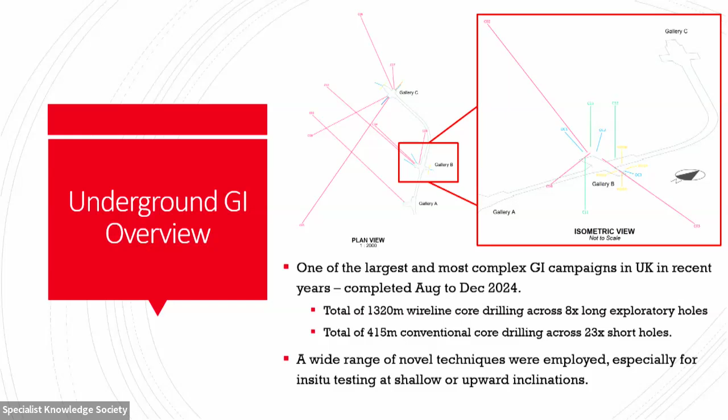A wide range of novel techniques were employed, especially with respect to the geophysics and in situ testing. Many of these holes were at very shallow inclination, or indeed upwards inclination. That's not conventional for ground investigation at all.

One of the primary components of the underground ground investigation was the drilling and logging. Core drilling was carried out by our specialist subcontractor Zueblin, a group company who also carried out the drilling for the SQ works. We generally used wireline double tube drilling at CH96 or HQ size - for those who understand ground investigation, that's quite a small core size compared to what's normal, which is Geobor S for a vertical hole.

And we used specialist electric hydraulic rigs, which were capable of drilling at any inclination. That was an important part of this GI because so much of it was at a very shallow angle.

Core logging was done by the STRABAG UK team, within the drilling galleries - that was deliberate, to avoid any damage and minimize the amount of transport and damage to the core before we logged it. Ultimately, we spent an awful lot of money getting the tunnel to this point, and an awful lot of money drilling cored holes. We want to be able to log this, and log the in situ conditions without damage to the core.

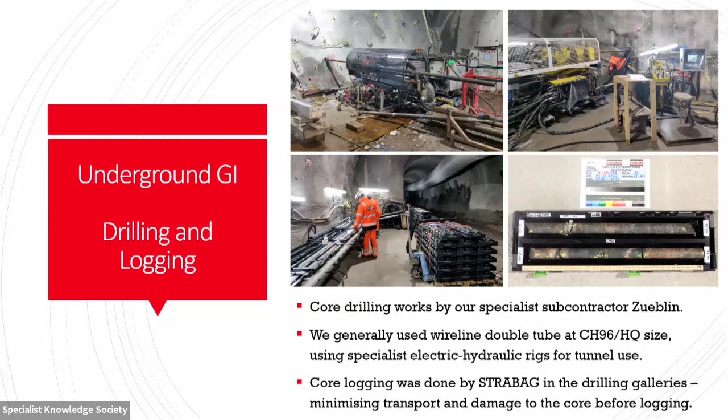I'll say a bit more on the in situ testing - we carried out a large number of quite varied techniques. The in situ testing was carried out for three main reasons. First was to determine the ground composition, the structure of a borehole. Our primary tool for this was wireline geophysics and televiewer data.

Again, because of the inclination of some of these holes, we had to come up with novel tool pushing techniques. Normally this is lowered down on a wireline winch on an A-frame; we were pushing in the tools with the drilling rig and then pulling them out with the wireline winch. That's not normally done. We also carried out tests for in situ strength.

We did three main tests for this. One is a Goodman jack - that's an older method designed really for hard rock, which we had. We used a high pressure dilatometer, generally designed for softer rock, but we actually carried it out to probably its operational limit. And we did a plate jack test - a fairly simple concept where you push apart the tunnel sidewalls with a very large hydraulic ram and measure the deformation of the sidewalls very accurately. That required an enormous amount of temporary works, the smooth blasting which Joe mentioned earlier, and preparation of bearing surfaces as well.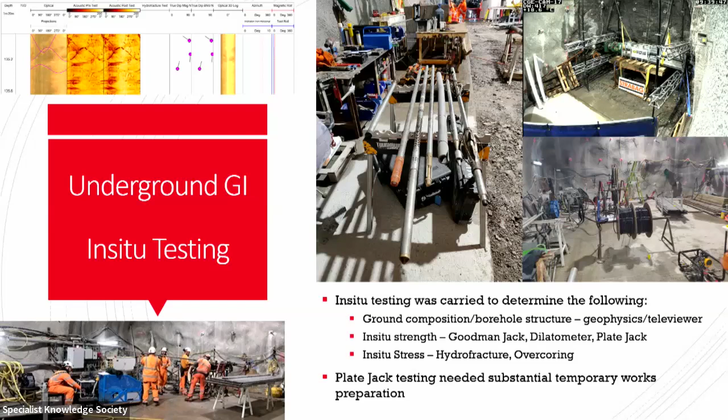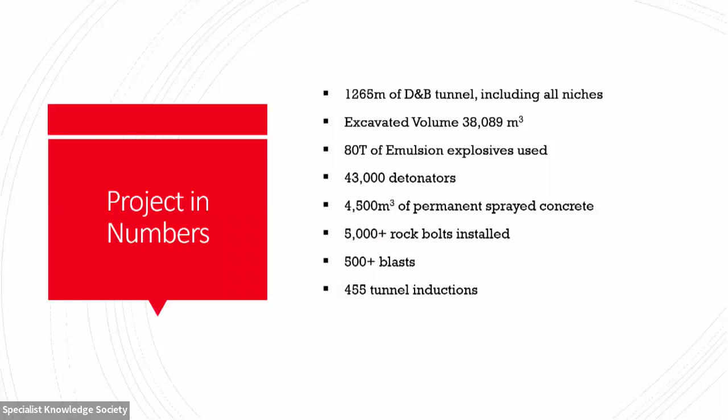In total, including niches, we did just over 1.2 kilometers of tunnel in the end. Excavated volume that had to go to the spoil storage area was just over 38,000 meters cubed. 80 tons of explosives, 43,000 detonators. We've said already, a lot of sprayed concrete, a lot of bolts, 500 blasts, and between Doug and myself, I think we did 455 tunnel inductions over the length of the project, as much as it pains me.

Other achievements, just to blow our own trumpet for a bit — if you've been to any of the awards ceremonies recently, there's always a Coire Glas representing party. This is probably one of the biggest drill and blast projects in the UK for recent decades.

Upskilling people is probably the most important one. Coming into this job, skill shortage was a real issue for us, so we've put a lot of effort into that. We've got another 10 qualified shot firers at the end of the project.

Hard rock SCL — a lot of SCL works happen in London, but hard rock SCL, so especially the drilling for that, was very important. Face mapping, actually finding geologists with sufficient experience in hard rock face mapping was not easy. And again, now there's a lot more core logging as well, should be thrown in there.

Engagement with the local fire and rescue service. There's another big project on the horizon here, but we were really glad that the local team could support us for the works we did, compared to the main works, so we didn't have to have our own dedicated team. They were there with us, along with LBA, for their fire risk assessments, and getting all of us together in a room to make sure that was demonstrable was really useful as well to keep us above board.

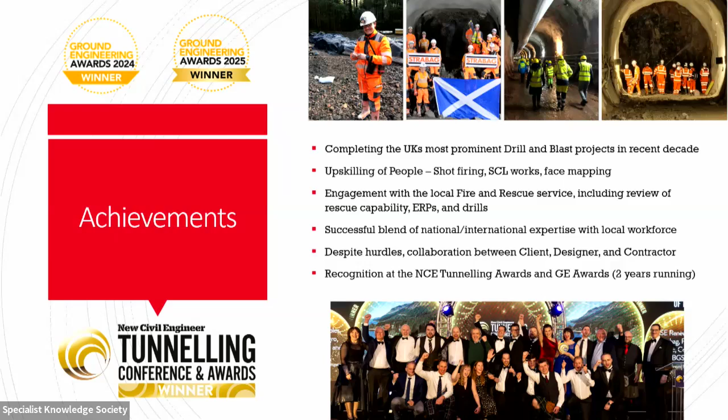A successful blend of national, international, and local workforce as well. One of the biggest achievements was, despite the hurdles we've gone through, the collaboration between the client, designer, and contractor, I think, is exemplary here. We're able to do this talk, we're all still friends — after some of the hurdles, some projects might not manage that.

Innovations — there's a lot of stuff we could talk about here, some already mentioned. Tunneling for GI in itself was probably the biggest innovation, but we've spoken about that at length. It's obviously proved really effective here. The information they've got for the main works is fantastic. The BGS have been involved all the way as well, so that knowledge is not being locked away — it's able to update the wider geological knowledge.

Smooth blasting — the methods we used here weren't really that applicable for overbreak control, but for the main works this is fantastic. When we're really looking to reduce the overbreak, we've got techniques that we know now work in this geology.

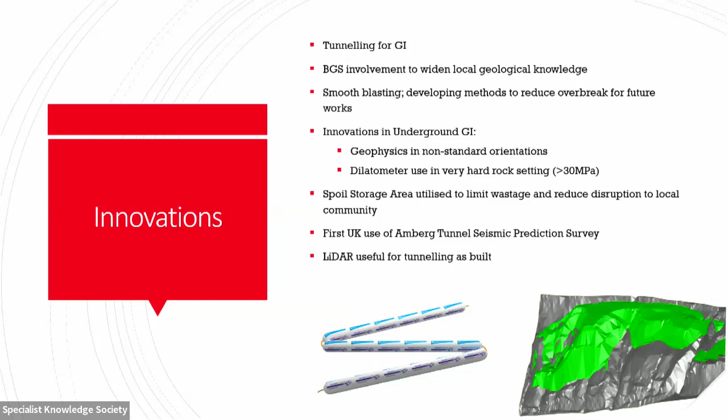Tom's already mentioned innovations on underground GI. The spoil storage area was used to limit wastage and not cause any disruption — all that muck that could have gone along the local road is still on site and available for future works in the area. The first use of the Amberg TSP was on this project. And the LiDAR, although mostly an underground GI tool, afterwards has been so useful for us for providing as-builts, for looking at data, for being able to look back on an accurate, millimeter-accurate as-built of the entire tunnel stitched together. Health and safety.

The biggest health and safety thing we're monitoring here is the ground itself and controlling that, but there's a lot of other things we could be talking about. Again, we've managed over 500,000 man-hours and 2 years have gone by since the last LTI.

We've had a good engagement with the HSE who've been on site, lots of health monitoring done. Environmental, on a site like where we are, we've had to be very, very good. Dan Arnold, our environmental manager, deserves special credit for his work with SEPA in the early days and then monitoring us throughout the works. Blast noise has been a key one at the start, and then nuisance noise after that. We've had 17 PMO visits without any non-compliances. There's a lot of good work there.

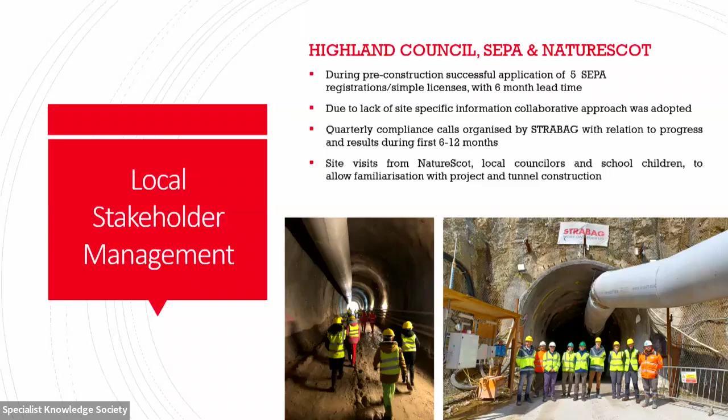Local stakeholders as well. So we've had the Highland Council, SEPA, NatureScot all out to site. There's going to be a lot more work like this in the Highlands, and we've been able to show them a little snapshot of what it looks like.

And now I'll hand over to Sean to talk about, most importantly, what's next. So yeah, we've done some fantastic work to date on the project, but there's still quite a long way to go in terms of the main works.

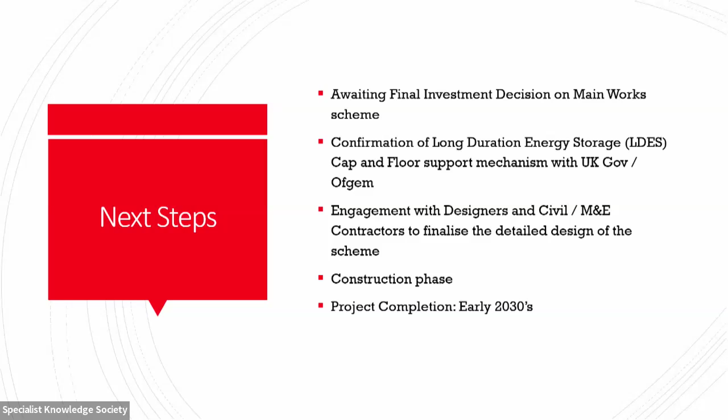So we're currently waiting final investment decision from SSE. This is heavily linked to the confirmation of the cap and floor support mechanism, which has recently been introduced by the UK government and Ofgem. So following this, there'll be a period of engagement with designers and contractors to finalise the detailed design of the scheme, followed by construction, and we're hoping that we can get the project completed in the early 2030s.